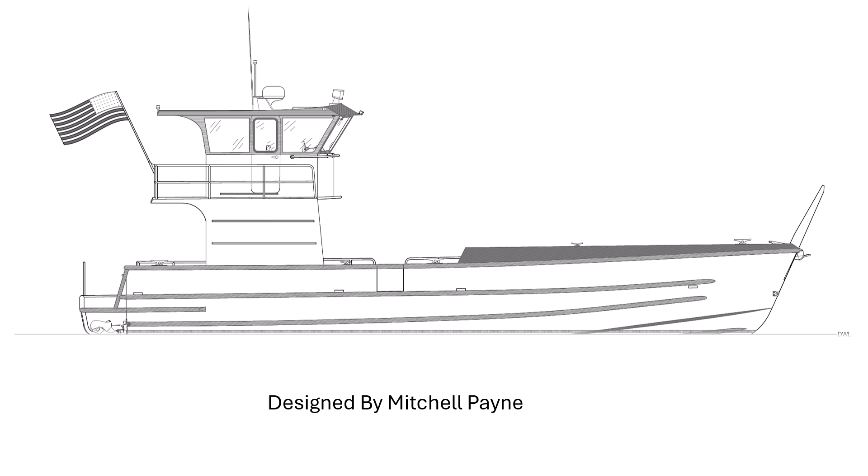It is called the PMLC 50, Payne Marine Landing Craft 50. It's a 50-foot catamaran made out of aluminum. The PMLC 50 is designed for the intercoastal waters in the Pacific Northwest, including Puget Sound, Canada, and the Southeast Alaskan waters. The boat may be going to small remote islands or remote locations that cannot be reached by car or plane.

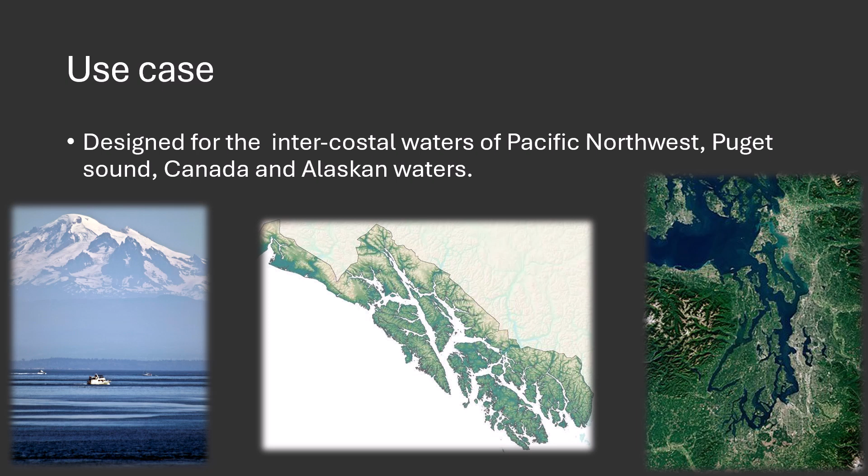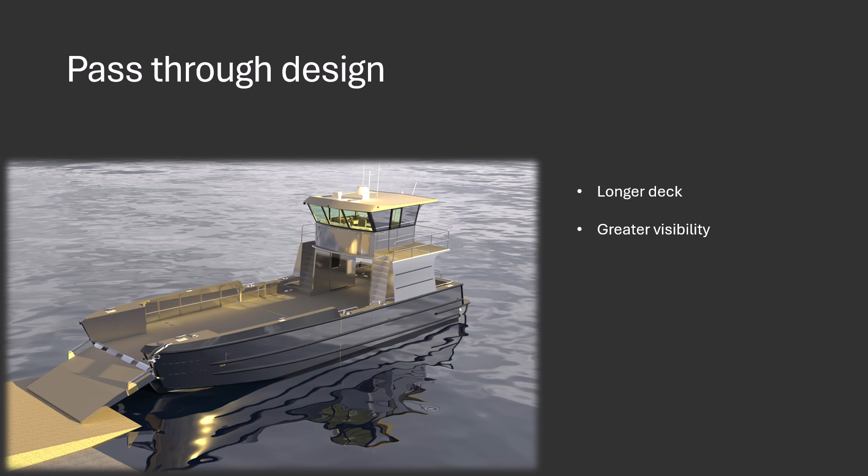I decided to do a pass-through design which raised the pilot house, increasing the deck space, greater visibility, allowing a longer ramp on the bow, and the tower legs have a head in one of them and engine room access on each side.

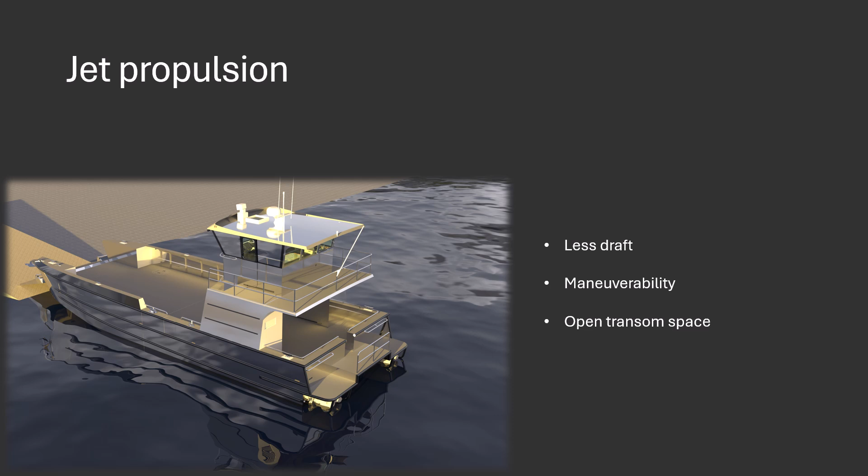I decided to do jet propulsion on this boat because it has a shallower draft, greater maneuverability, and an open transom space, unlike an outboard powered boat. It is easier to get on a dock, getting into a skiff, and you can drive this boat without damaging anything.

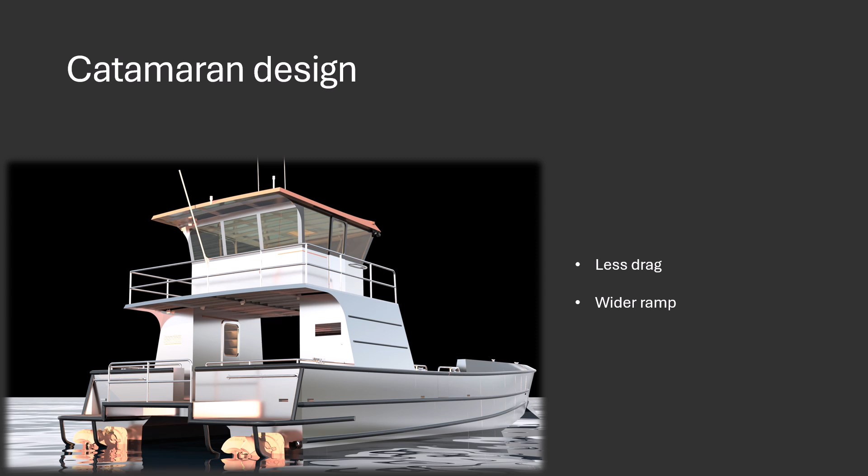I decided to design a catamaran because there is less drag. The ramp is wider on the bow because the hulls do not narrow in like a monohull. It is more stable, unlike a monohull. And when you go up to a beach, it will not roll side to side. It will be planted.

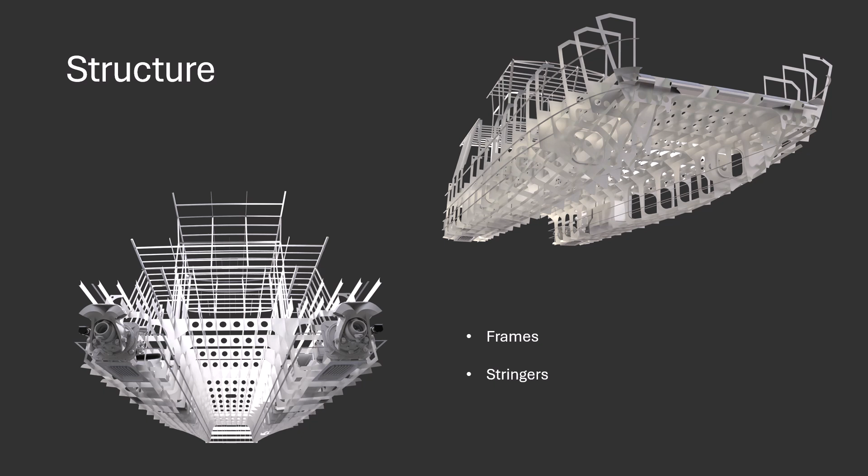An aluminum boat has way more structure compared to a wooden boat or a composite boat. The frame spacing is way tighter, and stringer spacing compared to a wooden or composite boat. Most of the strength is in the structure. Unlike a composite or wooden boat, most of the strength is in the skin.

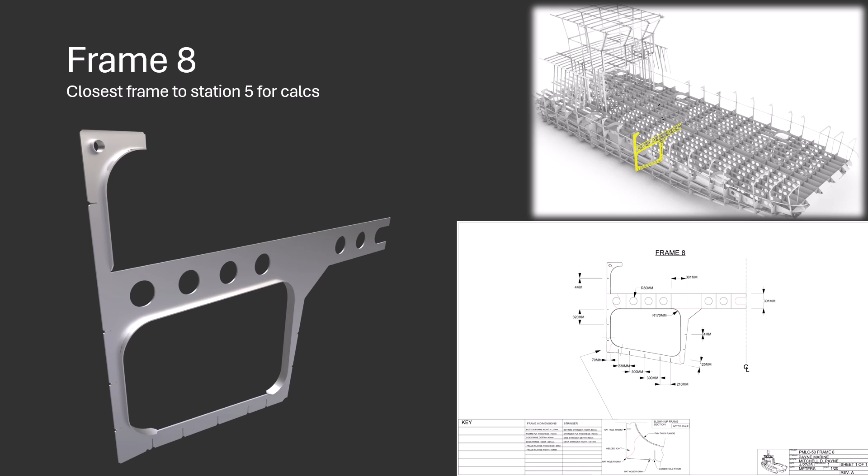Frame 8 is closest to Station 5, which is midship and is the highest loaded area, so all the calcs will be based from that location, for the bottom plating, side plating, bottom stringers, side stringers, bottom of the frame, and the side of the frame.

The superstructure on this boat is higher, so it requires more structure in the tower legs and upper deck to support the pilot house and for slamming loads, heeling, pitch, and hitting the bottom.

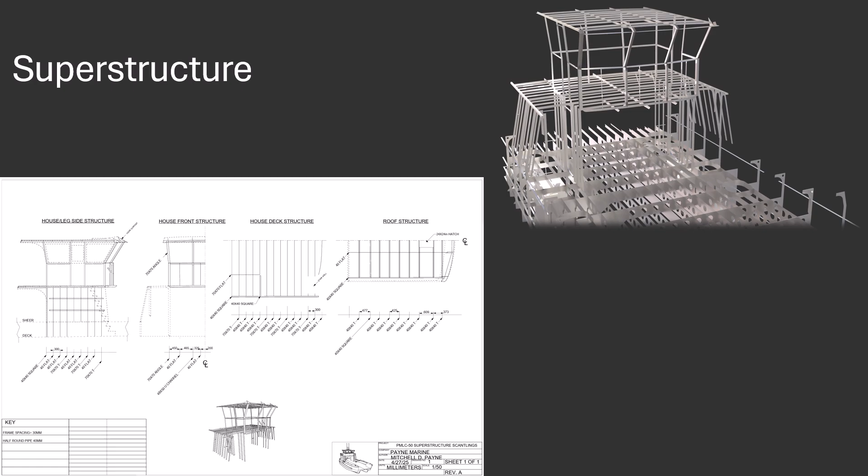The pilot house on this boat has a small settee that seats 4 people, a galley with a small sink and refrigerator, and a helm station that seats 1 that has 2 GPSs, radio, engine controls, engine control panels, defrost for the front windshields, 360-degree view, and side doors on each side of the pilot house.

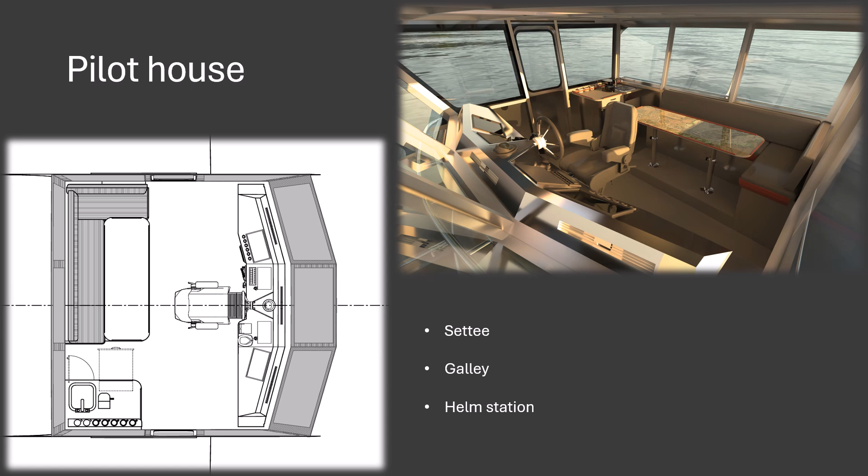The pilot house has a set of stairs on each side of it. They are 10 steps, and the pilot house also has a full wraparound railing with a middle bar so you don't fall through it, and a foothold and railing below the window for washing the front windshields.

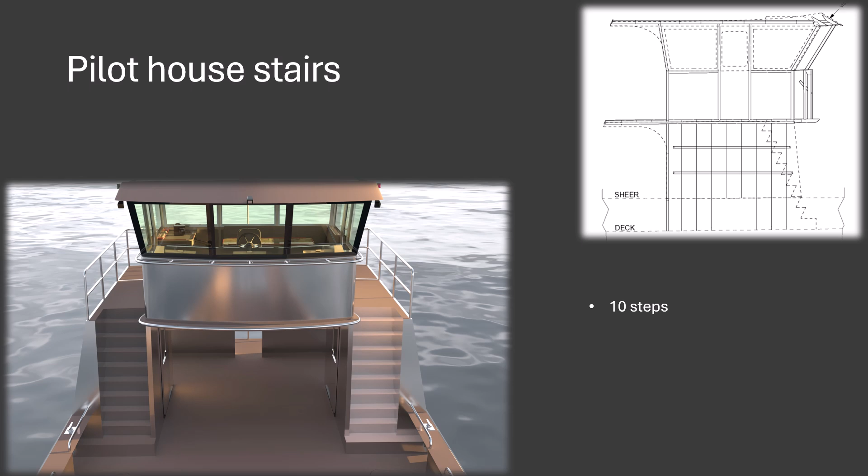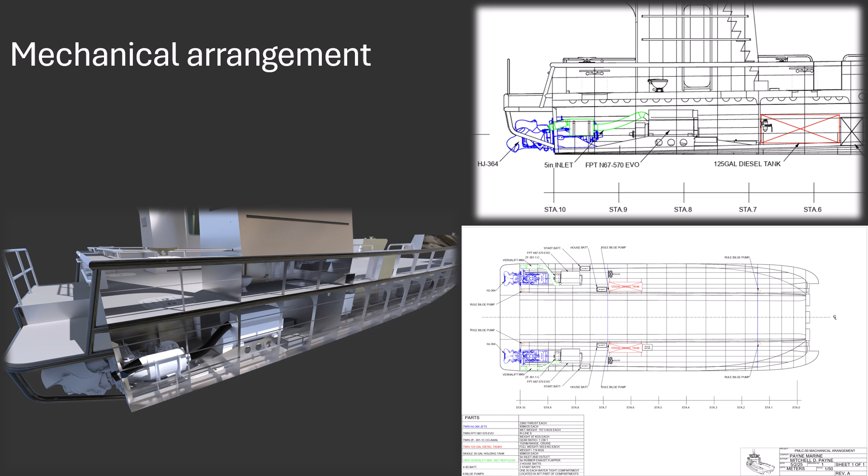The mechanical arrangement on this boat is fairly simple. It has twin jets, twin engines, twin 125-gallon diesel tanks, a black water tank on the starboard side, and 6 bilge pumps, 1 in each watertight compartment.

For the power plant of this boat, I chose a FPT 570, puts out 570 horsepower. And I chose 2 Hamilton HJ 364s because Roland had a model and they matched up with these engines.

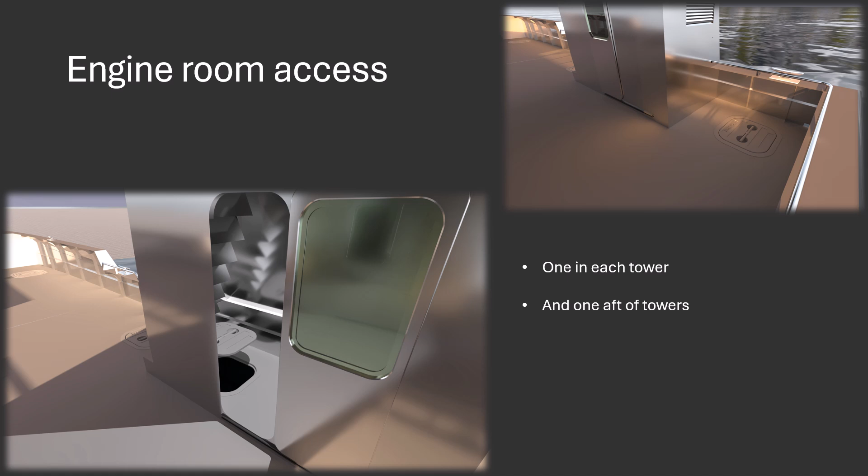There is engine room access in each of the tower legs, a 24 by 24 inch Freeman hatch that will land you in front of each motor, and a hatch behind the tower that will drop you down onto the jet on each side.

The anchoring system in this boat is not conventional. It's not in the center. It is off to the side on one of the hulls. Has a windlass anchor winch mounted, and a delta anchor.

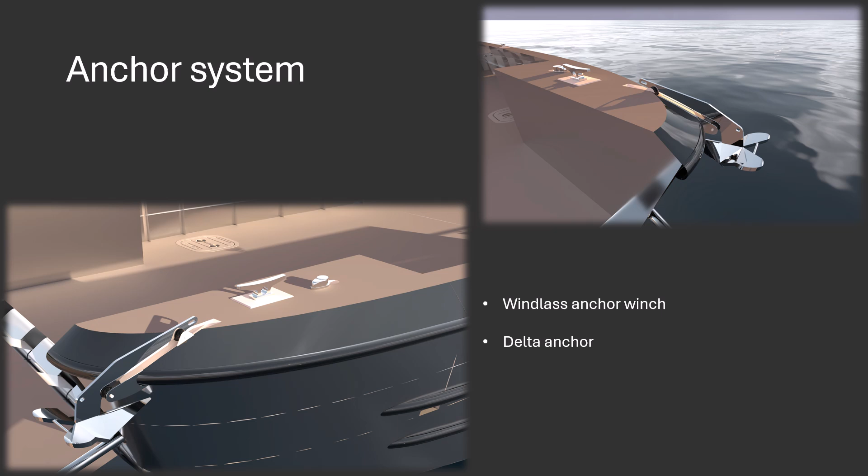Because this is a jet boat, you have to have some sort of protection for the jets, if you hit a dock, another boat hits you, logs, or any debris in the water. And it is very nice for dock access, man overboard recovery, fishing, and getting onto a skiff or any other boat.

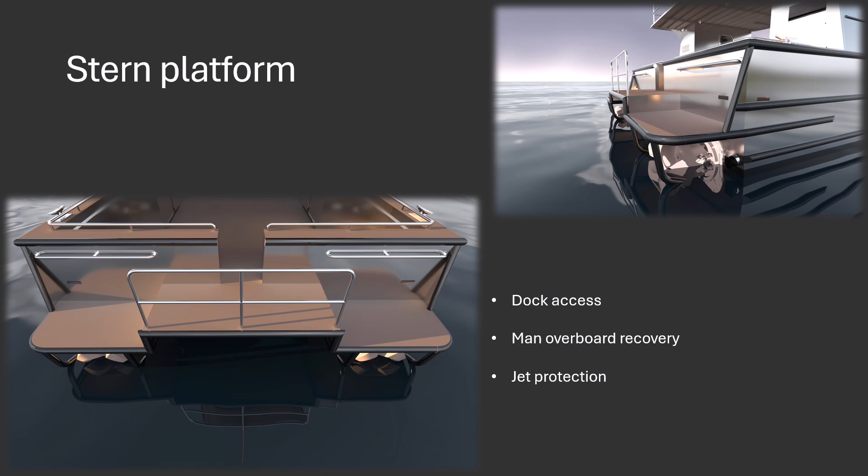The head on this boat is very basic. It sits straight on top of the engine inside of one of the tower legs. It is loud and would probably be fairly hot in there. The engine ventilation is straight behind the head, and you're relying on some good insulation to keep it cool and quiet in there.

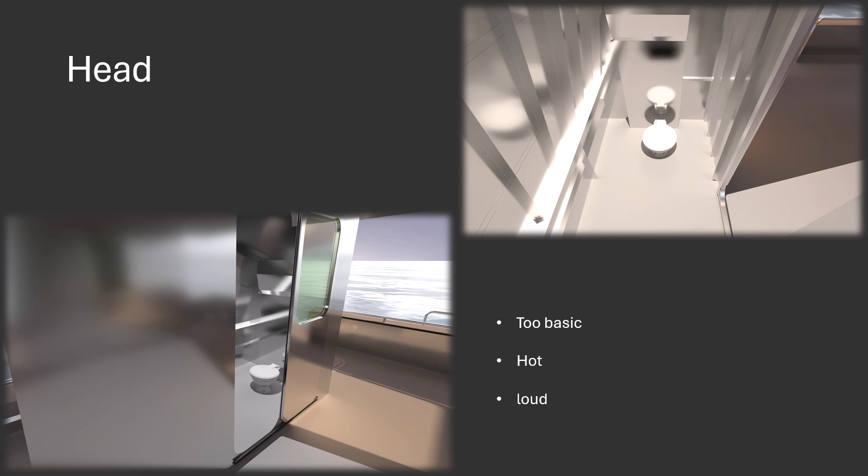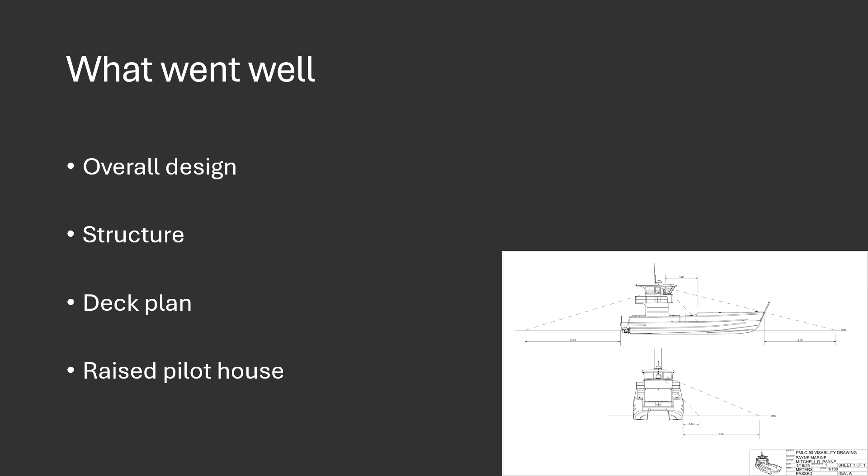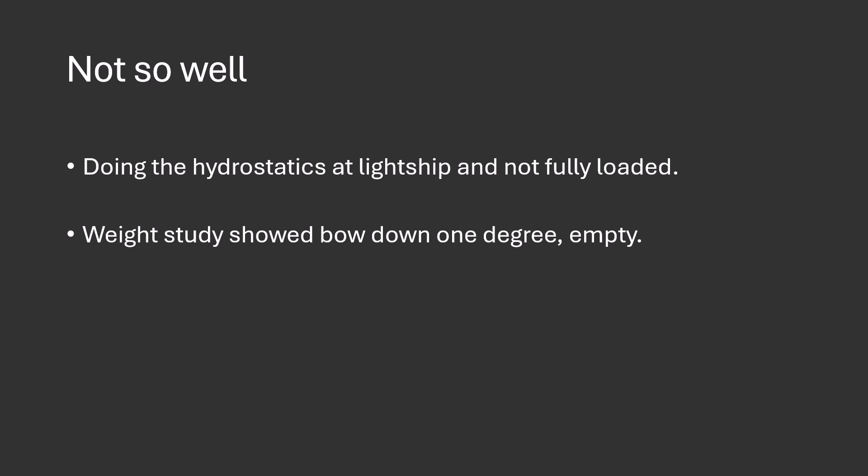Not so well: while I was doing the hydrostatics, I did them at light ship instead of fully loaded. So after I did the weight study and plugged in the new longitudinal center of gravity, the boat trimmed bow down empty. So once I put a weight on the boat, it trimmed bow down even more.

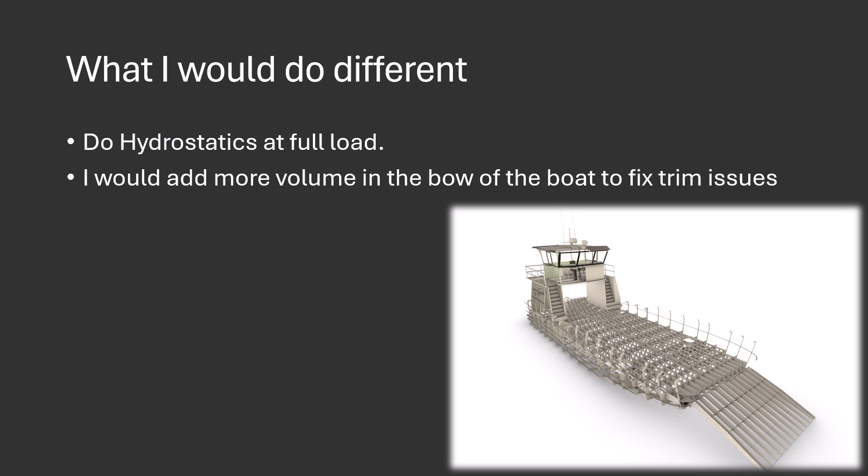And what I would do differently: instead of doing the hydrostatics at light ship, I would have put the 15,000 pound load on the deck and done the hydrostatics for that, which would have increased the volume in the bows of the boat and decreased the volume in the sterns, trimming the boat out. Thank you.